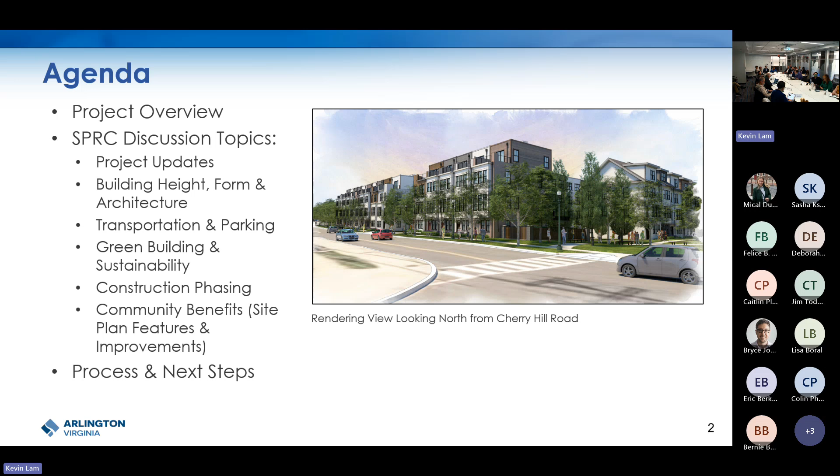So again, the site itself is located at 2134 North Taylor Street in the Waverly Hills neighborhood. The site currently consists of unoccupied single-family dwellings, a few outbuildings, as well as a large forested area. The site is bounded by Cherry Hill Road and North Taylor Street, and it's surrounded by various multifamily residential condos and apartments, townhouses, and there are some low-density commercial buildings on this block here.

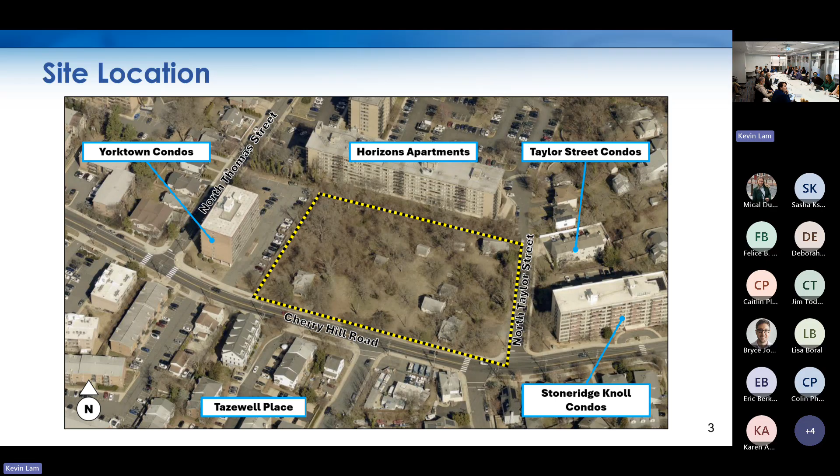Sure, can you share the screen? We're not seeing it in the virtual. They're not, exit and then. Yeah, hold on. Thank you for letting us know that. Let me know if you don't see it. I just see all of your lovely faces. Apologize, sorry, that could be about that. Worse, I'm seeing the presentation. So I don't know, maybe some are and some aren't. Might have to change the view settings. If you click view at the top of the screen and then focus on content, that might bring it up for you.

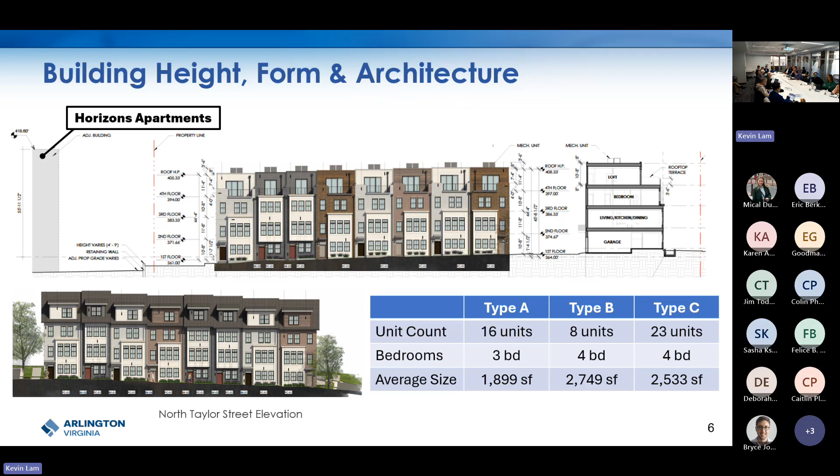Architecturally speaking, the townhouses consist of various shades of brown and gray brick with white and gray siding. The roof lines of the townhouses also vary, with some consisting of traditional pitched roofs, while others consist of contemporary flat roofs.

So I'll hand it off to Bryce to talk about transportation and parking.

Okay, so over the next few slides I'll cover the transportation overview of the project. I wanted to start by framing the transportation review with context of the transportation policies found in the Langston Boulevard area plan, which Kevin covered earlier. On the left is an excerpt of the area plan street network map for Area 3, where the site is located.

It does identify Cherry Hill Road and North Taylor Street as existing primary streets. The area plan has specific guidance for each street, including development of wider, consistent streetscapes, including 6-foot wide sidewalks. The area plan also anticipates new service streets to serve development at this location, but notes that the final configuration will be dependent on the proposed development.

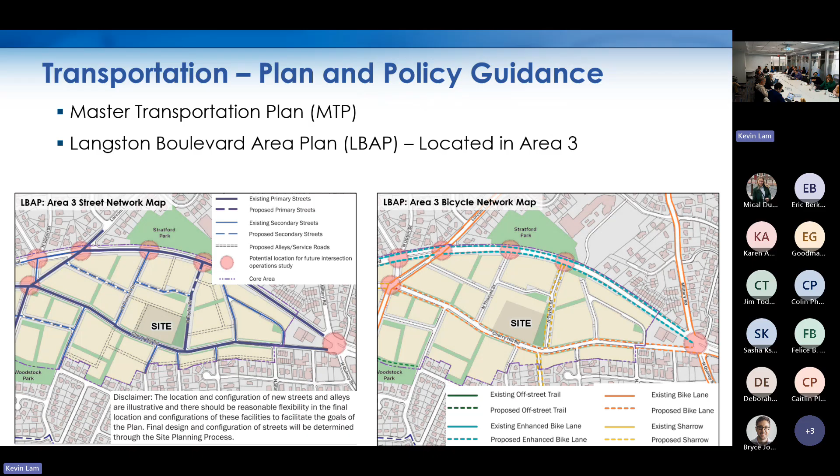Next, on the right is an excerpt of the bicycle network map. The area plan recommends bike lanes along Cherry Hill Road, shown in the dashed orange line, and then sharrows along North Taylor Street, shown in the dashed yellow lines.

Next slide, please. Here's an overview of the proposed site access. On the screen is shown a plan of the site, north oriented to the top left. The applicant proposes internal service streets to serve development, as you can see. The townhomes will each have 2-car rear-loaded garages.

The applicant proposes a total of 105 parking spaces, including 94 spaces within the garages at a ratio of 2 spaces per unit, and 11 on-street spaces for visitors at a ratio of 0.23 spaces. That does include 1 ADA compliant space at the northwest corner of the site.

To access the garages, the applicant proposes the new service roads I mentioned before. These streets will connect to the public road network. The 2 which connect to the public road network will be named North Utah Court, connecting to Cherry Hill Road, and 21st Court North, connecting to North Taylor Street.

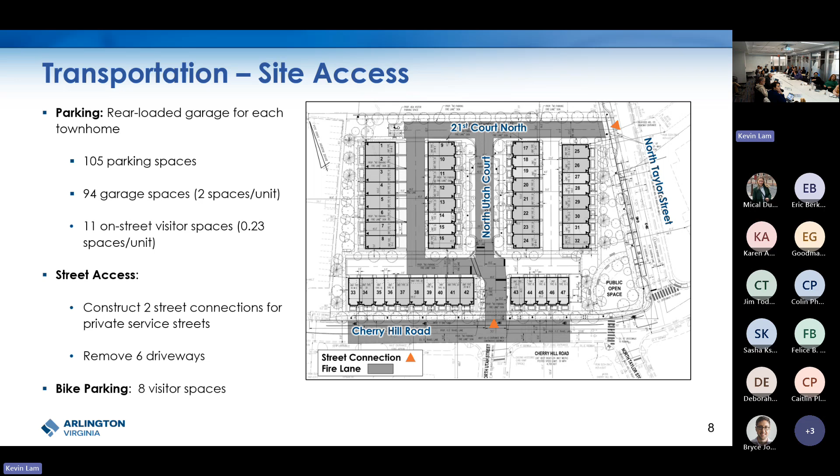These new street connections will allow for the removal of 6 existing driveways along Cherry Hill Road. Additionally, the applicant proposes 8 visitor bike parking spaces at the proposed open space at the corner of Taylor Street and Cherry Hill Road.

So here we will review the proposed Cherry Hill Road conditions. This slide shows a map of the site on the left, the street cross section on the right, and a summary of the proposed changes in the table at the bottom.

Today, Cherry Hill Road is approximately 30 feet wide, including 2 vehicle travel lanes, and the streetscape is about 8 feet wide, including a 4-foot wide landscape strip and 4-foot wide sidewalk.

The applicant proposes to widen the street to about 31.5 feet to allow for 11.5-foot and 13-foot wide travel lanes and a new 5-foot wide bike lane. The applicant also proposes a wider 12.5-foot wide streetscape to include 6.5-foot wide tree pits and a 6-foot wide sidewalk. Cherry Hill Road is owned and maintained by VDOT, who also has to review and approve any changes affecting this frontage.

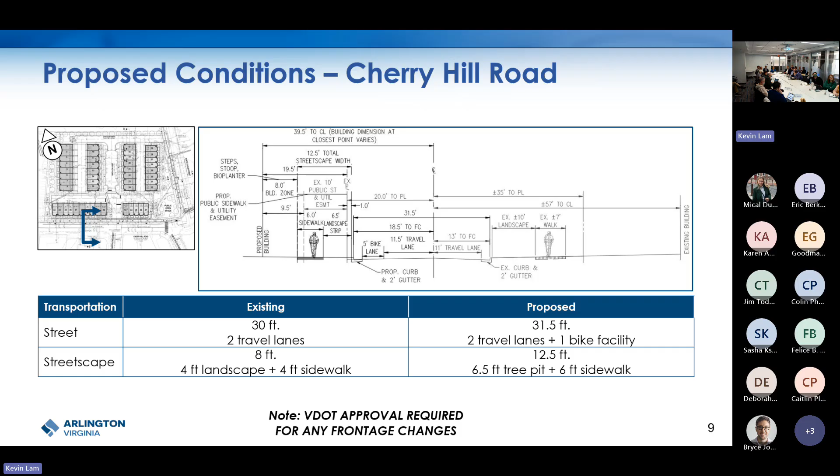Now we can review the North Taylor Street conditions. Today, North Taylor Street consists of a 22-foot wide condition, including a 7-foot wide parking lane and a 15-foot wide yield condition street. The site's frontage contains no curb, gutter, or streetscape.

The applicant proposes to widen the street to an approximately 34.8-foot wide condition. This new street section will retain the parking lane opposite the site, provide approximately 11 and 10-foot wide travel lanes, and a new 7-foot wide parking lane along the site's frontage. Additionally, the applicant proposes a new 13-foot wide streetscape consisting of 7-foot wide tree pits and a 6-foot wide clear sidewalk.

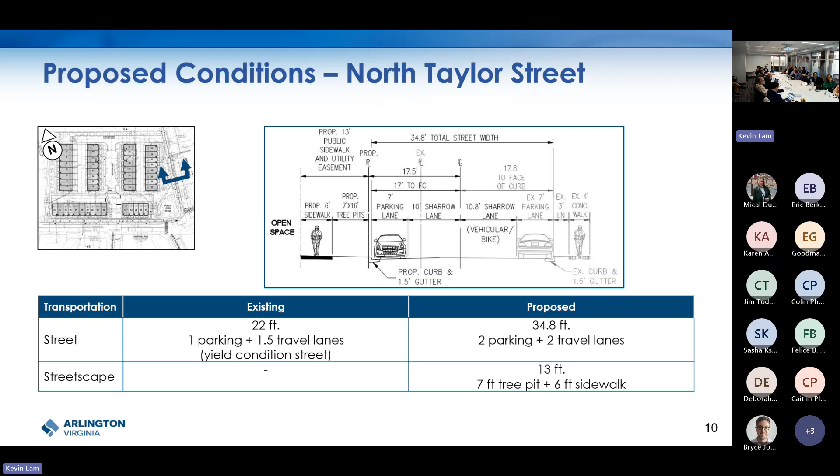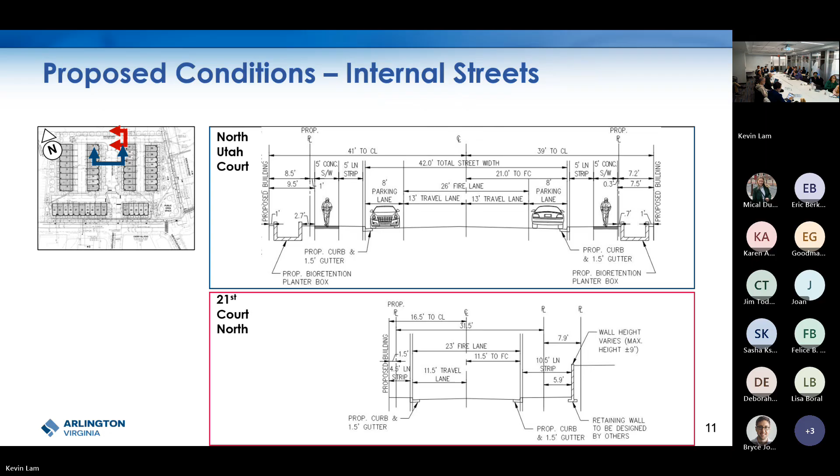Now we'll review the remaining streets. Here's a graphic of all of the internal service streets. It includes the two I just covered for reference.

In orange, on the left, there will be another service street which will be 26 feet wide. This is the other fire aerial access street. Similar to North Utah, this will include two 13-foot wide travel lanes in either direction. It provides direct access to the rear of the garages.

In red, the remaining streets will be 23 feet wide to allow fire access through the site. Similar to 21st Court North, these will include two 11.5-foot wide lanes in each direction. In blue is the North Utah Court section already mentioned, which is 42 feet wide. In purple is where North Utah Court is 30 feet wide, where it connects to Cherry Hill Road.

I've also marked the internal 5-foot wide sidewalks with dashed green lines, which might be a little hard to see from here. Generally speaking, these sidewalks link the front doors back to Cherry Hill Road and North Taylor Street. Where the streets abut the garages, there will be no sidewalks. For context, I also have the public sidewalks along Cherry Hill and North Taylor Street, shown in the darker green dashed lines.

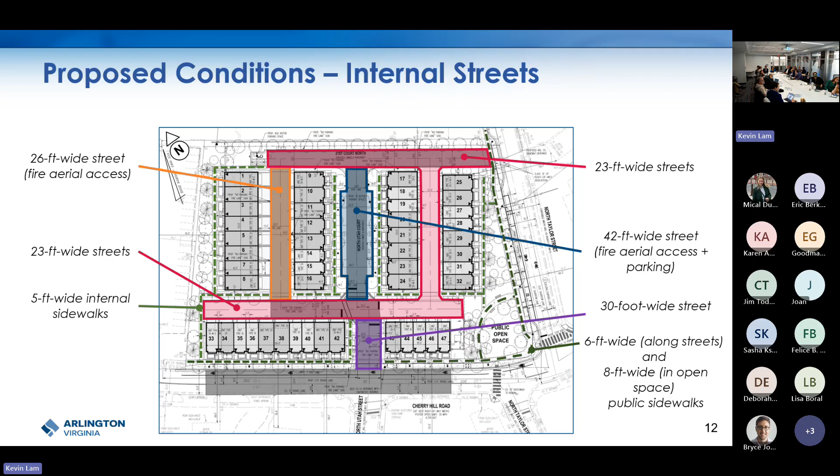Moving on to the final topic, community benefits, site plan features and improvements. As a reminder, the applicant is not requesting additional density. Therefore, the community benefits are informed by area plan recommendations for public space, as well as streets and streetscapes, as well as providing the standard set of improvements for site plan projects. Also, as a reminder, the proposed density does not meet the threshold density required to trigger the base affordable housing contribution.

Looking at these bullets, as recommended by the area plan, the applicant is providing new public space, though it is not the approximately 17,400 square feet identified in the area plan. They will be responsible for maintaining the proposed public space and installing it. The applicant is also dedicating a portion of their property to the county for street purposes on North Taylor Street, and installing new bike infrastructure per the area plan recommendations.

Finally, as with all site plans, the applicant is providing the following: new sidewalks, curb and gutter, street trees, and the public art contribution. They will be undergrounding adjacent existing utilities and contributing to the utility undergrounding fund. They will also be planting new trees and conducting tree replacement per county standards.

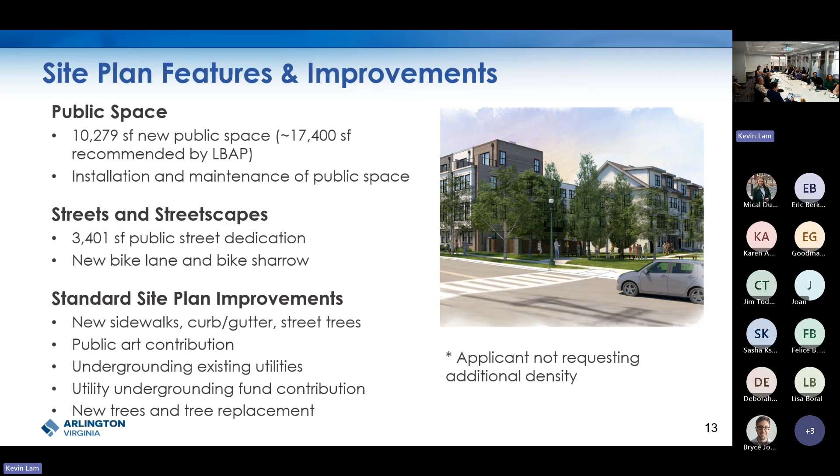So in terms of community engagement, back in December staff hosted an online engagement opportunity, which garnered 136 participants and 641 comments. In terms of tonight's discussion topics, most respondents feel the building height is compatible with surrounding uses.

Respondents appreciate the use of brick in the building facades, but some did critique the boxy and generic look of some of the townhouses. Many respondents believe the 2-car private garages provide ample parking, but many also expressed concerns about insufficient visitor parking and potential spillover onto nearby streets.

There is also broad support for the bike lane on Cherry Hill Road, and most welcome the proposed stormwater management facilities. A summary of the responses has been posted to the project webpage, which goes into more depth for each of the topic areas. We also conducted our typical community outreach to relevant groups and promotion methods through county channels.

Finally, tonight's SPRC meeting will be followed by the Transportation and Planning Commission meetings, anticipated April at the earliest, followed by the county board. That concludes staff's presentation.

I'll say briefly, obviously Nick Cummings with the applicant here again. Want to thank everyone for coming to the second meeting. I thought we had a great first meeting, and I'm happy to follow up on it. Go to the next slide. I'm going to try to move relatively briskly through this, but also not repeat things that Bryce so eloquently outlined for us, and Kevin as well.

For anyone who wasn't present last time or wants a refresher, the proposal is to develop the site with 47 townhomes with 2-car parking garages. They are 3.5 to 4 stories. Some have rooftop decks. They're handsomely designed homes with high quality finishes on all ends. We'll be talking about that in a bit when we get through architecture. We have 94 parking spaces in units, 11 visitor spaces on our internal streets, and we had 8 new public street parking spaces with our plan too.

Kevin, I think, was just talking about it. This proposal includes brand new streetscapes, stormwater management infrastructure, and public open space, all of which implements the Langston Boulevard area plan. Let's go to the next slide.

Staff, I think you guys summarized a little bit of what we talked about last time, but we did discuss land use and density, site design and layout, as well as open space and landscaping. I think it was a really good discussion. Some of the most important comments probably came about through the public open space, the intent and thought behind the plan, and in particular what was and wasn't considered when the plan was developed and the area plan was already approved. We had representatives from the Langston Boulevard Alliance here who were able to speak to that, which I think was really helpful.

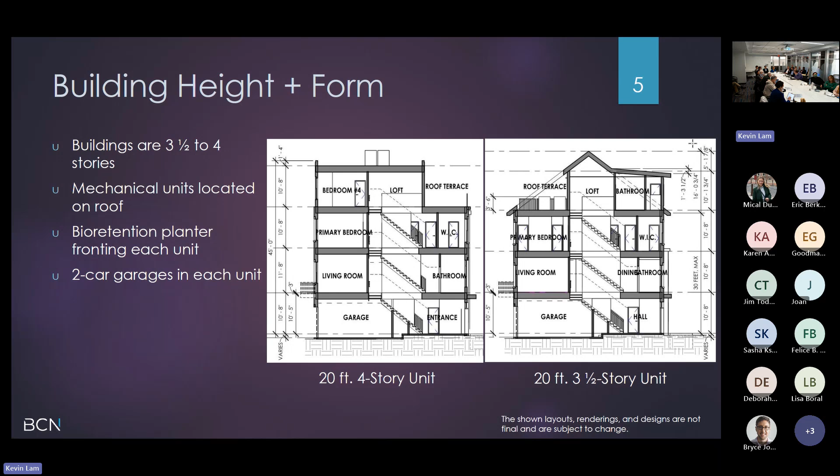Let's go to the next slide. We're going to show floor plans here for the 20-foot wide units. The depth of this unit is about 40 feet. We have efficient stacking of the circulation core through all the floors. We try with these units to maximize the efficiency of the layout to provide the best usable living space within the square footage. They're generously sized, but still smaller than your typical single family home new in Arlington County, which is over 5,000 square feet. We feel these are well designed so every square foot can be used and should be used. They include up to 4 bedrooms, 4 full bathrooms, and 1 half bath.

The ground floor space provides flexibility for an office, a workspace, a bedroom. I think there's a bathroom attached to that, or an exercise room. It helps accommodate families, multi-generational, or varied living arrangements where someone might need to be on the first floor. Overall, they're designed to be open floor living experiences with generous windows, providing ample daylight and connections to the outdoor landscape.

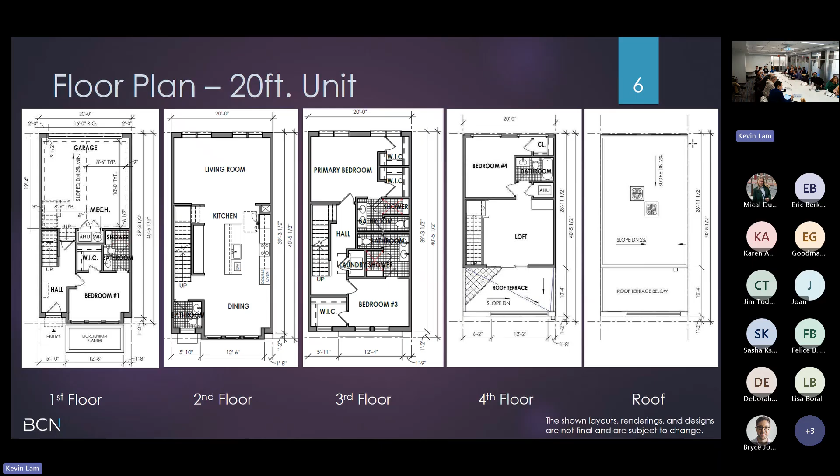In the next 2 slides, I'm going to show some elevations, and I can speak more in detail about the architectural inspiration. The surrounding context here provided visual cues. We have flat roofed masonry buildings in red, brick, tan, and buff tones drawn from the neighborhood to the east, west, and north. They're used to inform a design response that is both contextually grounded and architecturally refined.

And Chris is here, he can speak more to exactly what that means. Building materials, elevations, architectural design, and massing composition have been carefully considered to achieve an attractive and cohesive result. A flat roof is a deliberate contextual choice, a modern, refined interpretation of the dominant roofline typology that frames this site on all three sides.

Brick is the primary cladding material, honoring that neighborhood precedent with masonry, but expressed through a curated four-color palette that brings warmth and variation rather than monotony, which is something we sometimes see in Arlington with use of brick. We work to add texture to the facade too, with unit bays that are modulated to create pedestrian interest and interior functionality.

Generously sized windows within each bay flood the interiors with natural light and maintain a strong visual connection between inside and outside. This is a biophilic design principle that grounds residents in the natural landscape and changing seasons around them. And finally, we did consider the historic context of the neighborhood. We chose not to imitate it, but rather to provide a contemporary aesthetic that is both contextually informed and forward-looking, meaning it supports development's design and marketing goals for these new families who are going to buy these units, while delivering a street experience that we think raises the bar for residential architecture on this corridor.

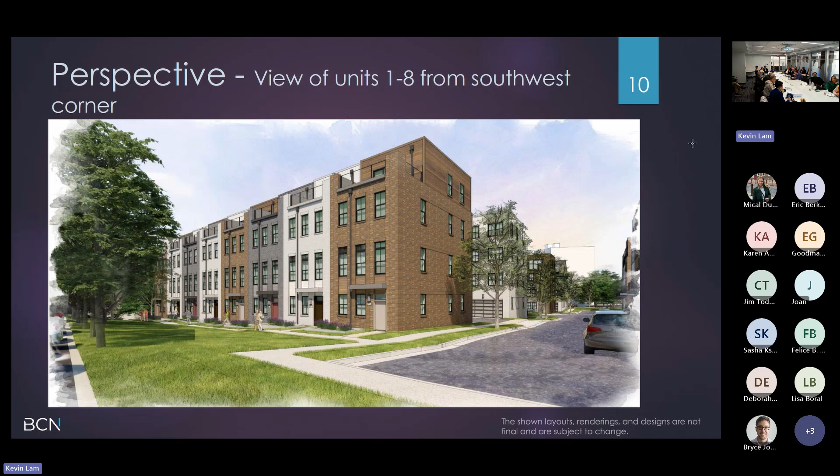There's some perspectives here we can run through, and we can look at these later as we're discussing design. Those renderings are gorgeous.

Transportation. We talked about this last time, but I want to highlight that we reduced the curb cuts from 6 to 1. That is on Cherry Hill Road, which is a very good thing for pedestrian safety, including only one curb cut on North Taylor, where it's an open site along its entirety today. There are significant improvements to all modes of transportation here, including pedestrian traversal.

Reduced density from the approved plan, which is of course an assisted living facility with employees and residents and quite a few more people than we would have living in this community, means less impact to traffic on this neighborhood road. That includes multiple modes of transportation, including cyclists and pedestrians. The trip generation numbers show just shy of a 50% reduction from the approved plan, which is great.

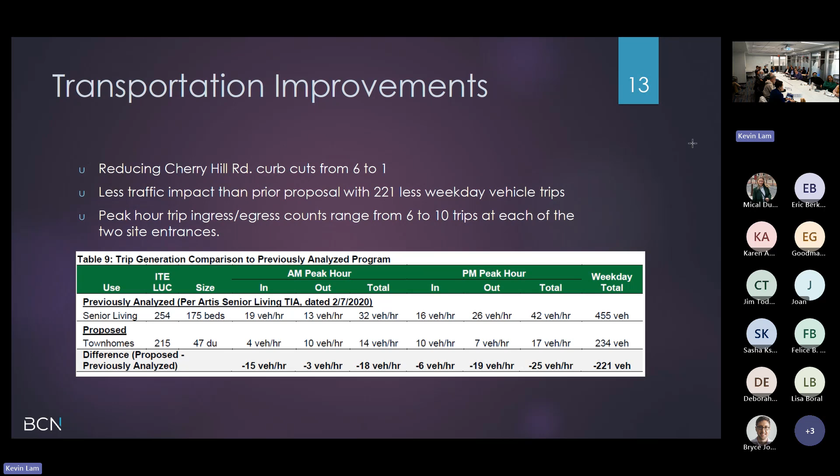The inclusion of public open space, new street and sidewalk improvements, and enhanced improvements on Cherry Hill Road is going to make everything safer. Less traffic, fewer curb cuts, and increased pedestrian safety—all of which is a goal of the plan. I'm going to the next slide.

This highlights our parking across the site, where we show 2-car garages, 11 on-site visitor parking spaces, and 8 public parking spaces on North Taylor Street.

Often in these presentations we'd also do a deep dive on the streetscape itself. I think Bryce outlined that perfectly and really showed what we're doing, where, and what the different widths and dimensions are. We can refer back to all of that during discussion.

Next we have a slide on parking dimensions. There were some questions on whether we accommodate two full-size spaces in the larger units. We do, except for the 8 on the west side.

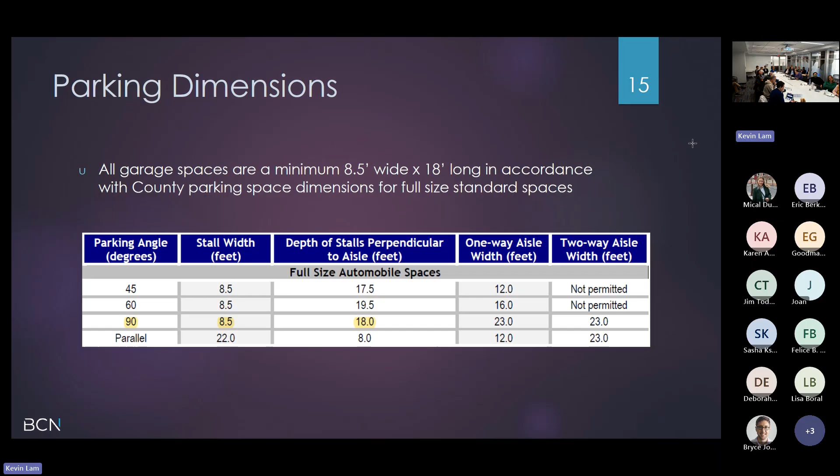Next slide is green building. Those are the garage dimensions—that's going to prove to you that it does fit, and we can walk through that if anyone's still concerned. Let's go to the next slide.

We've met with staff to discuss options for green building. Important to remember, as staff said, we're not requesting any bonus density, so we're not participating in the green building incentive program. We do understand and agree these are important issues for the community. We can confirm we would include Energy Star appliances, WaterSense fixtures, pre-wired charging outlets in each garage, and LED lights—all elements of GBIP that would be included in this community.

We're also aware the county had previously endorsed a certification program for townhomes, I think it was called Green Choice. They don't use that program any longer. We researched this and found there may be a certification program for townhomes the county hasn't yet used, and we're exploring its use on this project. We'll discuss that with county staff, and it's possible we could be a pilot for a new certification program that hasn't been used previously.

Our team can speak more to that. Obviously it'll be up to Paul Roman and Ms. Keeple whether or not they're interested in pursuing that with us, but it's something we can look at. So that's what we have for today, and we're eager to jump into discussion.

Hold on just a second. I see, Jim Todd, your hand is up. You have a clarifying question?

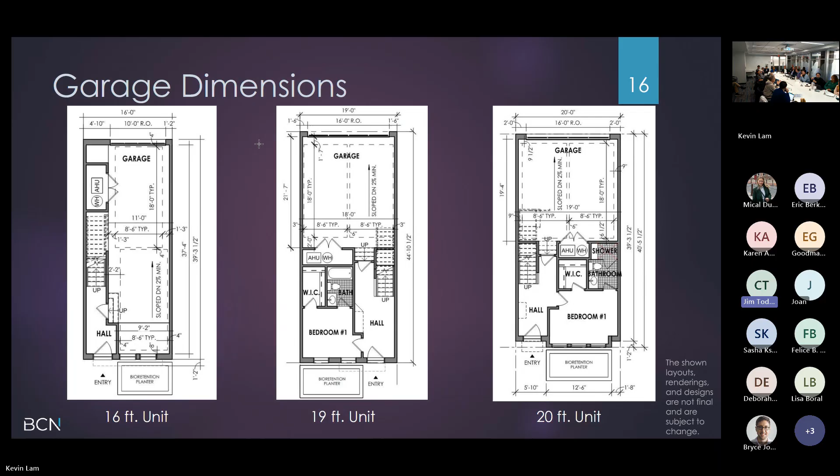I do. Could you review again the Langston area plan open space guidance for the lot in terms of square footage versus what the applicant is proposing? I think I heard that the Langston plan was larger, and I was just trying to clarify the two numbers again. Yeah, let me pull that up. Working on it. Which presentation? Thank you.

So, conceptually, this shows what is envisioned for the site. This triangular green space is what is identified as public space. The size of this entire green space is identified as 20,000 square feet minimum to have a plaza and park hybrid amenity, meaning it should have some hardscape and some softscape landscaping.

So that's for the entire triangle. However, part of the triangle is not on this site. So we adjusted the size to approximately what is actually identified to be on the site, which is around 17,400 square feet. Does that help answer the question?

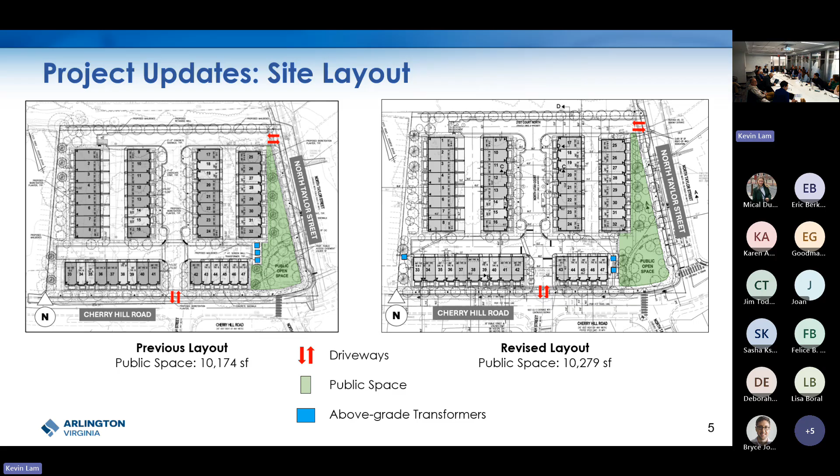Also, from a policy perspective, we're not asking for bonus density on this project. So the delivery of substantial community benefits like this, while identified in plans and an expectation of the county, is not necessarily a legal requirement—all these benefits need to have a nexus to the impact of the development itself. So asking for a substantial 20,000 square foot park with a townhome development of 47 units is just a bit out of proportion in practice.

But it's really that we've been able to lay out a community that we think is going to be successful, that's going to have enough units to make this project work, and that provides a really great neighborhood park of an appropriate size that matches the approval today. Somebody could go ahead and build the Artis facility today, and the park would be exactly the size that was approved in 2020. So those are some of the factors that have influenced our thinking.

Mr. Todd, the other thing I'll mention is, it's more obvious to some of us, but if we were going to expand the park to roughly 20,000 or 17,000 square feet, we'd almost certainly end up losing a row of units, and the project would simply not work at that point.

So just to be clear, in no way am I suggesting that 20,000, or I think the county said 17,000, is appropriate. I was just wondering if there's a middle ground, if we lost one or two more units somewhere, just gave us a pinch more open space. I wanted the developer to consider that, staff to consider that.

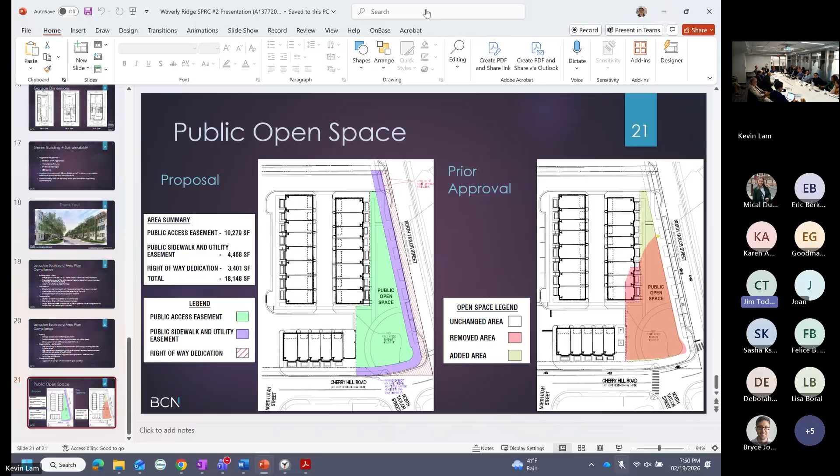I'm not suggesting all 17,000 feet is something that Cherrydale is seeking. It's more a question I'm posing, is there a middle ground, a compromise, another creative solution? Because I do really like the park that's been designed. I'm aware it's basically the same size and same basic design as Artis's, but I'm noting the guidance was hoping for very substantial open space, and I was wondering if there's some middle ground, some creative solution that maybe goes slightly beyond the four corners of this property that still gives the public a sense of more greenery, green space, more tree planting, something.

Thank you, Mr. Todd. We're going to move on. Commissioner Torres, you had your question.

Three clarifying questions. One was about the elevators. He mentioned they are not going to be possible for the 16-foot units, but they are going to be for the 20, but he didn't mention anything about the 19, so I wanted to know about that. I also wanted to know if they would just be elevators that are 3x3, a standing elevator, or if it would be able to accommodate a wheelchair. My second question would be if the optional terrace would be able to accommodate a lot of planters if someone wanted to make it into a garden structure. And the third question is, you moved one transformer, I'm wondering why not all of them were moved so the green space could be bigger.

Those are great, I wrote down a few: the 19-foot unit, and the elevators and the nature of the elevators you're able to install on these units. What can you say?

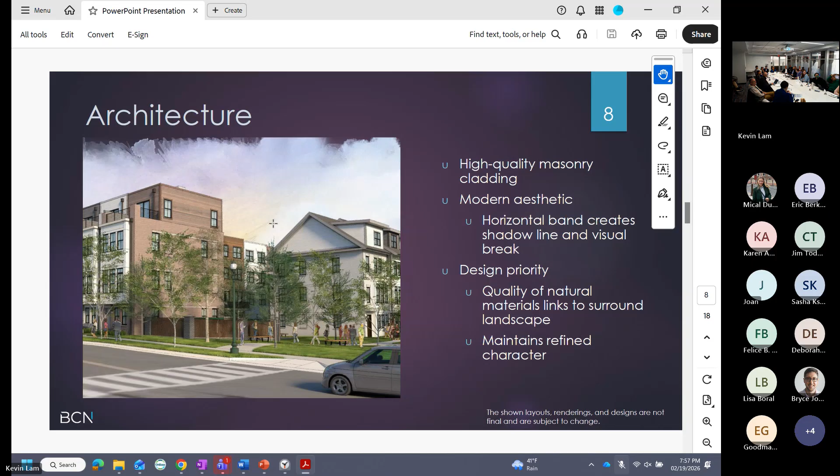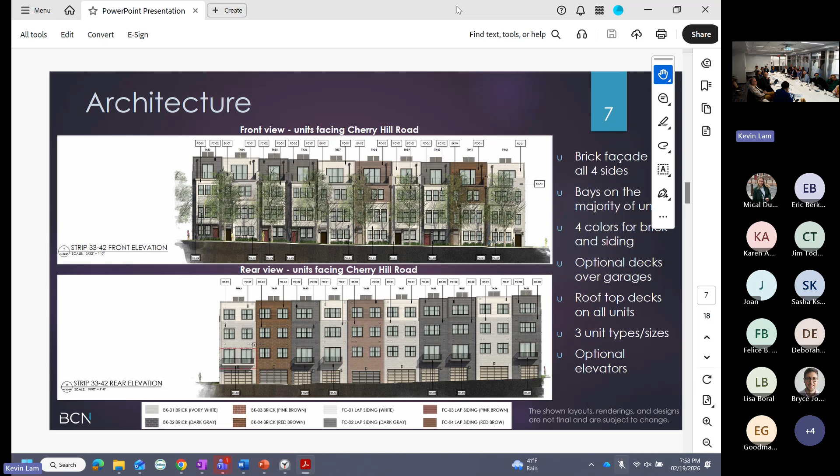Because I'm trying to understand the alignment - if you have a grade change, the alignment of the floors, the entrances, the garage. I kind of drew a straight line on my screen, but it was kind of staggered. So I was trying to figure out if that's what you're accounting for, if you're treating it as flat, but then it's not flat.

The units do step down with the grade. So the first floors, typically most first floor steps between units - there might be a couple that don't, but in general they step between the units. That's the end of negotiation, front to back - the back elevation is different from the front. So I guess what I'm asking, these lines here - yes, they stagger.

They're right, but in a random way, or are they following the grade? Yes, they're following the grade as much as possible. However, the grade change from front to back also dictates where that ends up being. Because they're all next to each other, to me they look like there's variation I can't figure out - whether you've aligned the same unit but staggered it, or actually followed the grade. You see what I'm saying? Yeah, we're primarily following the grade, yes.

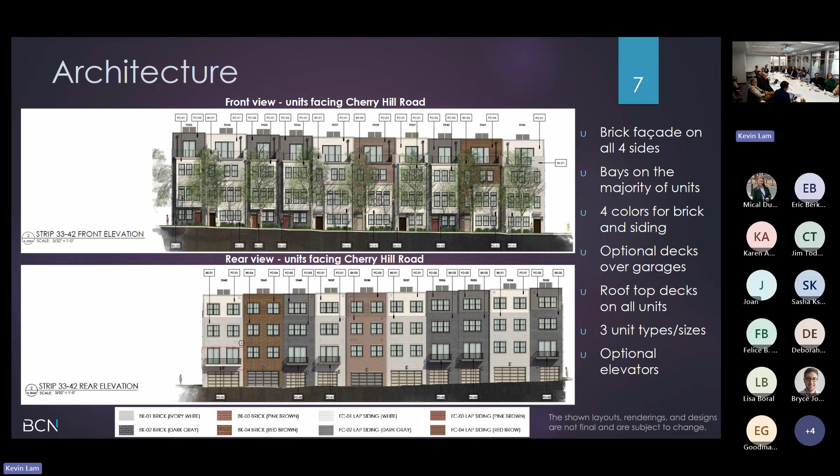So then the balconies will not align? No. Sometimes there'll be a couple of units that might be the same elevation, but not on Cherry Hill. Some of that grade change is the negotiation between the front and the back. So that's true for the balconies on the garage side? Yes. The floor plates will go along with the elevation, yes. Could I see the site plan also?

Some of the garages seem to have a black spot, like that rectangle - what is that? Those are the balcony indicators. Those are the balconies - thank you. They're gonna be black.

So all the units are getting balconies in the back except for the... Not all, just the ones indicated. It's an option. Oh, sorry, I apologize. Okay, so can you help me read this then? So these are not balconies? They're indicated as balconies, yes. So these get balconies except for these? It's an extra cost. Okay.

In the site plan process, we don't necessarily designate where all the balconies are. Every unit could possibly have a balcony, or there could be none - you're just showing options. We're showing them now. Okay, I was trying to read that. And when any one of these gets a building permit, the county's gonna want the 4.1 plans to match the building permit plans perfectly. We have to demonstrate that optionality now, so it's reviewed and determined acceptable if people choose to implement it.

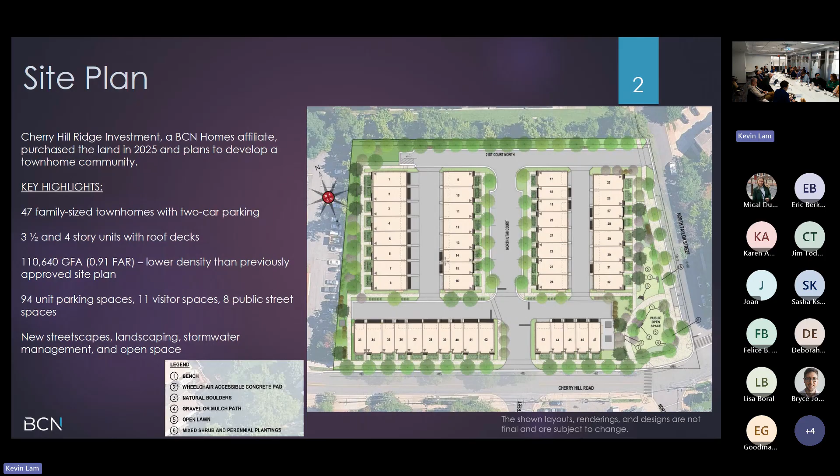Just checking in - the artist rendering shows fully grown trees in front of the townhomes. Do you have sufficient soil volumes for those trees? Yes. How long will it take?

I know we do, because we have county standard ones, they push us really hard on this - but how long will it take them to get there? I just assumed there was enough soil volume, but how long will it take to reach maturity? Karen, could you tell me roughly how long a tree takes to get to maturity with these volumes? I'm thinking 6-7 years at minimum. The calculation we do is all based on that, but I don't know all the details.

Soil volumes are a very important topic these days with the county, and they're very strict on what is considered enough spacing, et cetera. We do sometimes compromise them only to fit in another tree, so there's discussion of how many trees we can fit, and whether we can compress them a bit less than standard to get more trees. Here, I think we were standard with spacing, so everything should have standard soil volumes.

Maybe could we have the information for PC? Yes. Thank you. Anything else on building height, form, and architecture? No, moving along.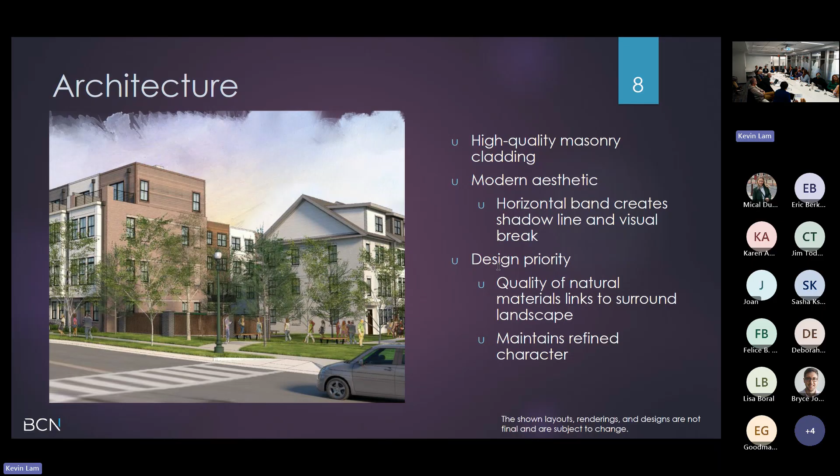Transportation - questions, comments, concerns? Jim Todd online: my question is about the bike lane on Cherry Hill Road. Is it only in front of this stretch of property, or would it extend at least to the next street past Yorktown? How long is the bike lane this developer is proposing, and is the county playing any role in implementing bike lanes beyond this property? So the applicant's just proposing the bike lane in front of their property.

To date, as far as I'm aware, there's no plans for immediately extending the bike lane. I know we have the Langston Boulevard areas 2 and 3 study going on right now for transportation improvements later, but as far as I know, for the immediate future there's no plans for a bike lane to be extended.

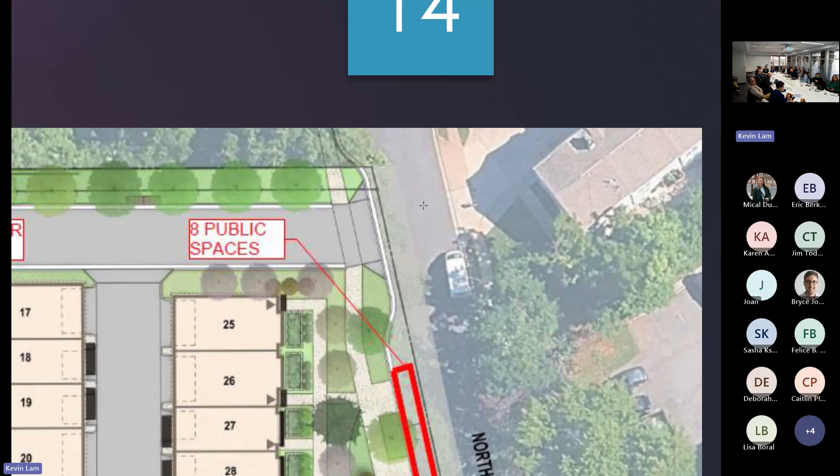Is it still part of the Langston area plan to have that go through all the way? It's not the cross street—everything you're seeing on our plan are internal driveways we're not planning to dedicate as public streets to the county. The planned cross street would really be to the north of that, in my view; I never thought it was on this property. I thought at one point it was at the Horizons parking lot. Yeah, but that could have been many iterations, maybe depending on Yorktown redeveloping other things. I just wouldn't expect to see it for a couple decades.

Are you thinking about the dash street shown on the street network map? I think so, yeah, it's right on the property line between this and the other. Just trying to get an idea of what traffic and pedestrian activity is coming. We hope that's a fairly low traffic, low impact joining of those two properties, since it's a cul-de-sac that ends at Horizon and should be relatively quiet, without fast travel and people running into each other turning out of their driveways, hopefully.

When you're widening Taylor Street, you're widening into your own property, I'm assuming? Part and parcel of this whole discussion about the open space and its size, which has been one of the most difficult topics in this case—we lost about 3,000 square feet of site area that would have otherwise been open space, but it's now street. And unrelated to the development, we already have issues with the narrowness of that street, so I think two lanes is a must, especially if you're trying to put parking on both sides, closer to the Arlington standard.

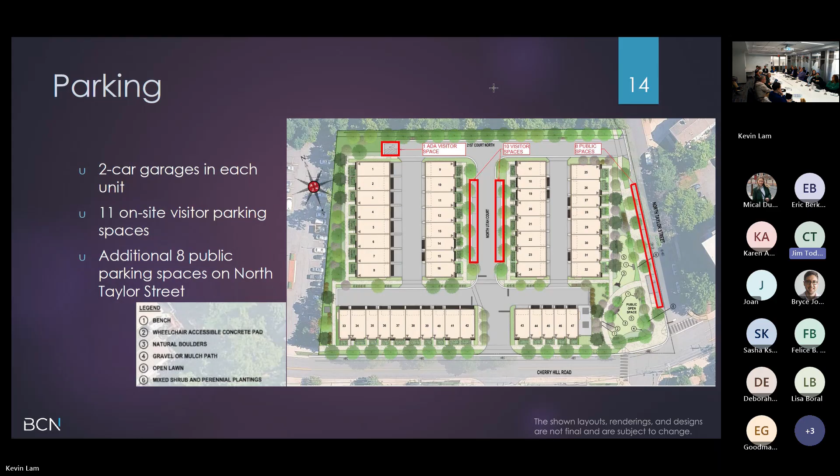Okay, great. Thank you. So although we may have already discussed this as we've been doing transportation, the next item on the agenda is parking. Are there any other comments, questions, concerns about parking?

I think it was helpful to see the layout of the garages. I did miss a little bit of that. So for the smallest units, it's truly a 2-car garage, I was wrong. The 16-foot wide ones have tandem parking, so they do truly have 2 spaces, but one after the other.

It's the 19-foot unit that has 2 8.5-wide parking spaces, which are actually 8.6. They comply with Arlington County regulations for the size of the space, but we know that when people are in there with 2 cars and all their stuff, it's probably not gonna fit well. But you could have 1 car in, 1 car out, and they could get around each other. You could have 3 cars.

Okay, yeah, so that is for all except for the 16-foot units. And the 20-foot units really do easily fit 2 cars in the garage.

And how many of the 16-foot units are there? What's the ratio for that? What do we got with the numbers of each size unit?

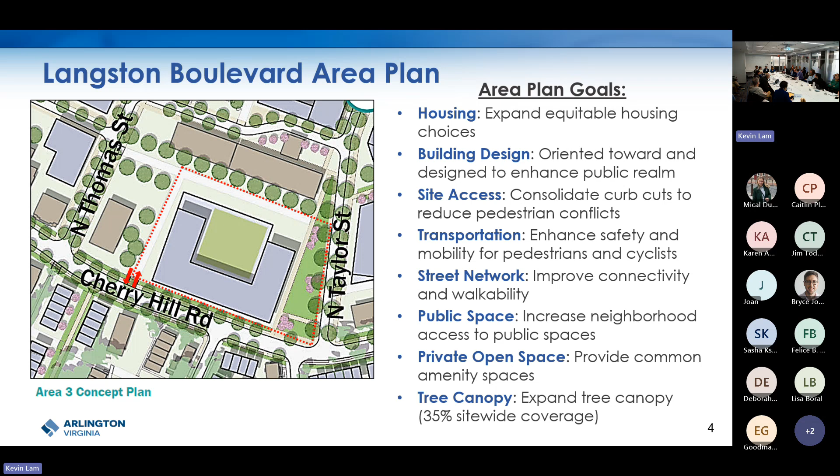Something we wanted to emphasize is that a townhome community with units priced roughly where Brian was saying is delivering ownership opportunities far less expensive than new single family construction. It's a far more affordable way for a family to start a life in Arlington with something they own, versus a single family property, since a new single family home is up to close to 3 million now. So a smaller unit in a townhome in a denser development can provide a less expensive option, giving different options.

I think what we're trying to say is that you're going to set a precedent of having an ultra luxury townhome in Arlington, which makes sense, it's a very affluent area. However, it does provide a starting line of what potentially can happen down the line. I have no problem with that, but I agree with Commissioner Rivera that we would want the presentation to be a little more honest and say, this is going to be ultra luxury, and these are the benefits, these are the cons.

But also, if you're going to provide ultra luxury, I'm a little disappointed about some of the questions we've asked, like could you add a green roof? Could you add solar? If you're providing ultra luxury, that's kind of standard now in that market, I would assume. So I wish you all the best, I really hope this goes through. But my concern is, you mentioned Culpeper 800 - the reason people buy those is because it's still close enough to DC and below $1 million, providing the space they need.